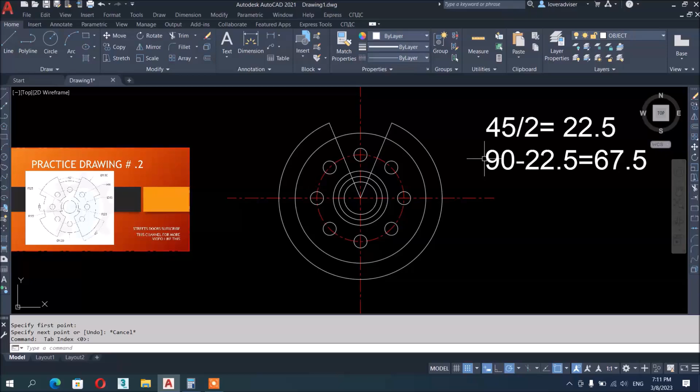Okay, we will start to open a new file. We will remove this grid. Okay, first set the units.

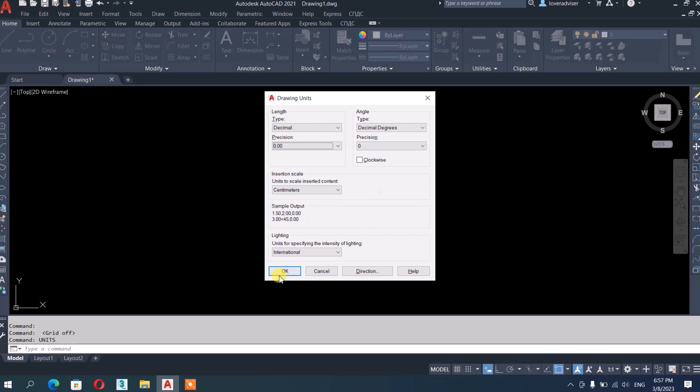Then we will use centimeter, here we use two precisions. We can also use Limits, but before that you have to know what is the size of your drawing.

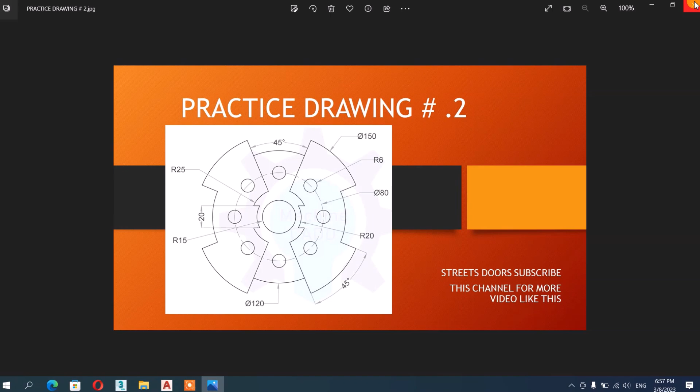See, this is the maximum size, this is 150 diameter, so it means we can keep here 300, a little bigger. So Limits, enter. There is 300, comma 300.

Then we can use, sir, it's all mechanical. First we will do 10 practice drawings of this, then we start the... maybe you forget. No, no, it's okay.

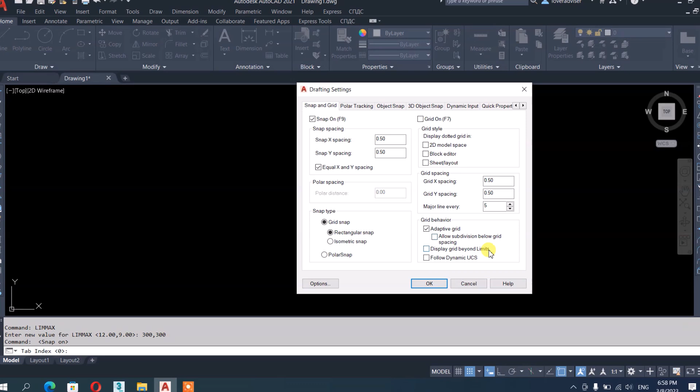It's good, when we are using this one, we are learning too many commands. When I studied more, it was very hard. So after you learn the commands, you can make any type of drawings.

So this is snap, we will use 2D spacing here, and then also snap setting. Okay, this is our drawing sheet. After Limits, we put here 300.

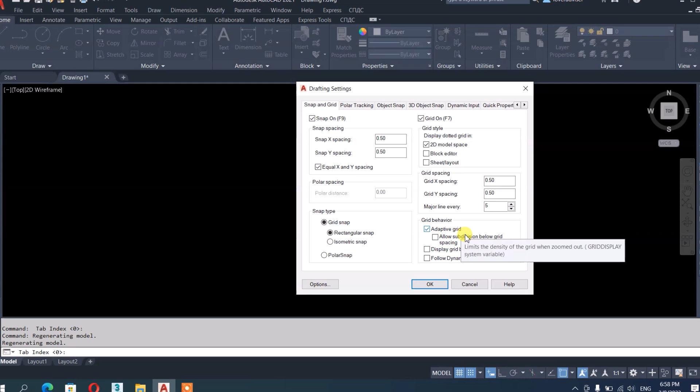Then we make the grid setting. You must know this setting. Must be 2D model space, adaptive grid, and all this unchecked. So the window will be seen in this way.

You can see video in video here. So then we have to set the layers, LA and enter.

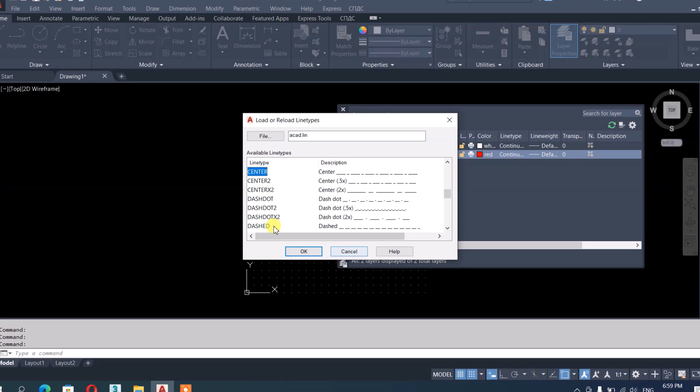Layers, L A enter, and we need here two layers. One is center line, we can choose any color. We're using red color, and then this is the load line type, C for center. Okay, use this center and okay.

Second, I need for object. I am using this same white color, and also I am using this continuous line type. Layers, third, I need dimension.

Dim, and here I can use the green color or magenta color, anyone. Okay, this green color for dimensions.

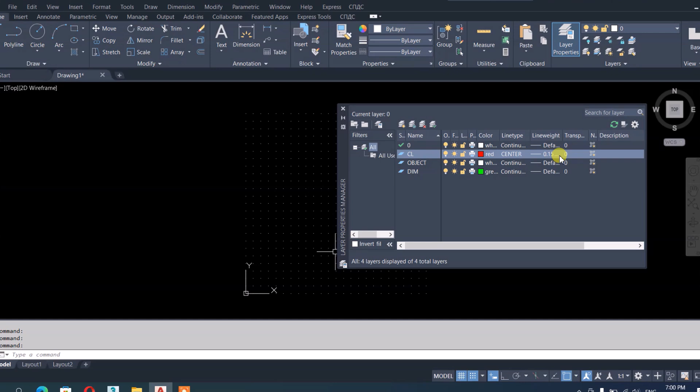Also, we can use this pen assignment, 0.15 mm for the center line. For the object must be heavy thickness, must be 35 or 40, and the dimension also 25 to 20. We give the thickness of the line weight.

So now we will use this center line first for making the center line. See here, line, L enter, then approximately start from the center. So this is almost center of my drawing. So this is ortho on for the straight line, so it goes straight.

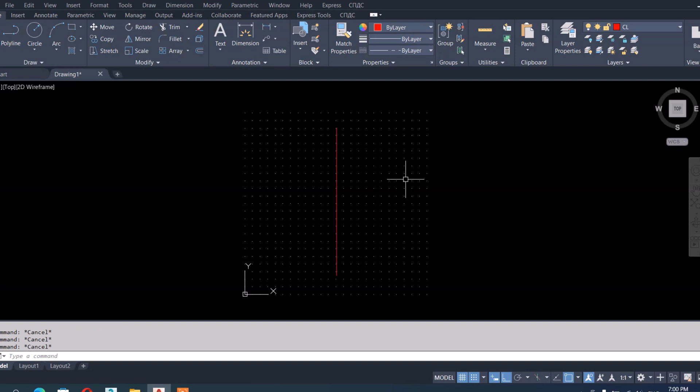And now we will rotate this by rotate command, RO enter, select object, take from the midpoint, and then use C for copy, and then click up. So this is rotate copy. In this way you get the center point of the diagram.

See now my center. If you want to remove this grid, you can remove by clicking here. So now you are getting this clear screen.

Here also, if you want to show the center line clearly, make LTS and give here 10 more spacing. So he shows the tabs bigger than before, LTS means line type scale.

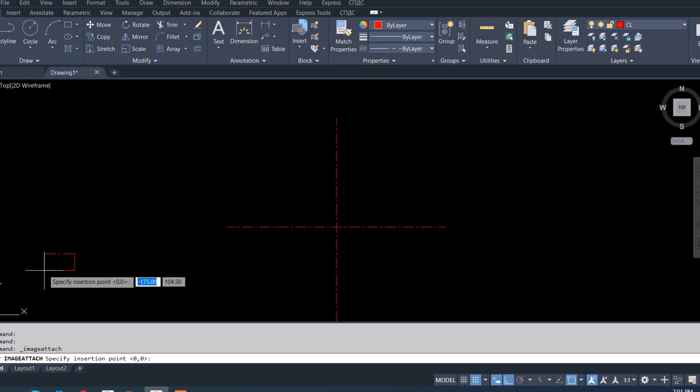See, insert a raster image and go to this practice drawing. Today is about this drawing. So I am inserting here, and then I scale this one around 5. So this is my drawing today.

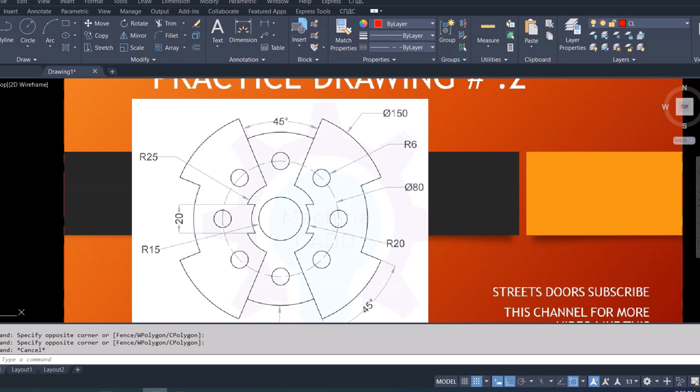Practice drawing number 2, we have to make today this drawing. So here we are finding one small circle, and then other circle is radius 20. Then we have dia 80, dia is 80, this dia 80 means this is the center point of the circles. Then maximum dia we have dia 150. So we will start gradually this.

First I will change the layer and I am using this object layer. Here first I will make the first circle, his radius is 15. So C enter, and go to the center point, and this is 15.

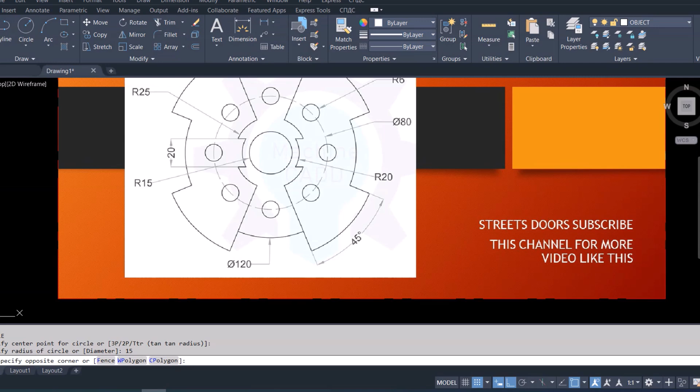Then he is saying the second is here, this is 20. So C enter, center, and then this is 20. Then he is saying we have one other circle, his radius is 25, so we are making this circle 25.

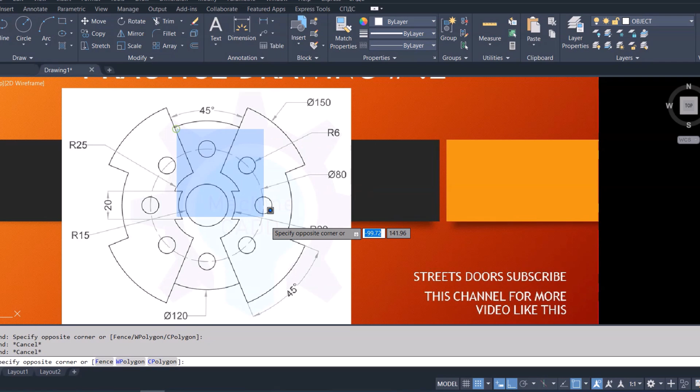Okay, now we completed this one, right? First 3, yeah, first 3 we completed. Now he is saying this small circle, his center dia is 80 regarding to this.

So I am making one circle, center, and his dia D 80. So this is the center dia of this. Using this center line because this is not a circle, this is showing the center line.

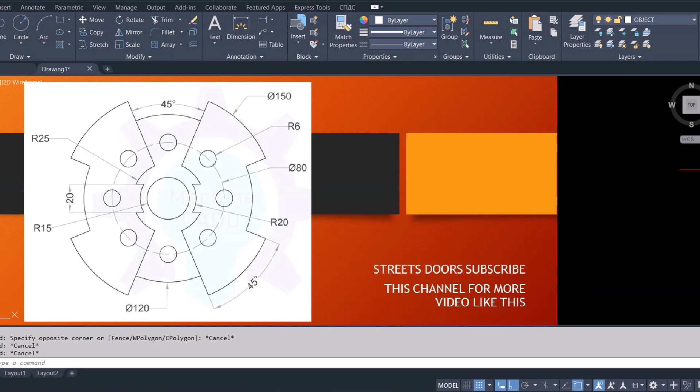See here from this straight 90 degree, he is using this small circle. His radius is 6. So how many this circle? 1, 2, 3, 4, 5, 6, 7, 8. Right? 360 divided by 8.

Today I will give you another command so you can make perfectly this, without calculating any angle. Center and here I am making this, radius is 6, correct? Now I need the 8 circles.

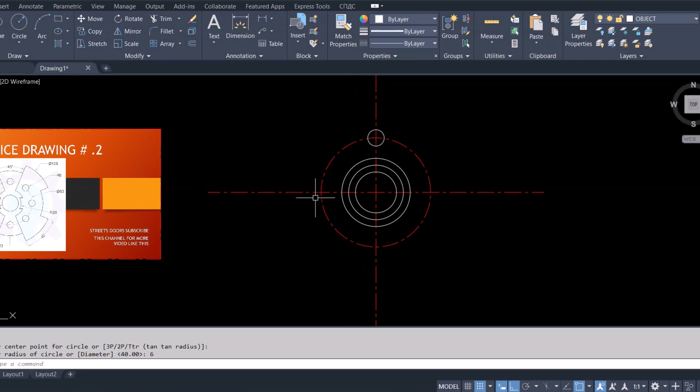See, if you will see any similar object in similar distance or equal distance, we are using array command. What, array command? Array? Yes. See, first AR enter,

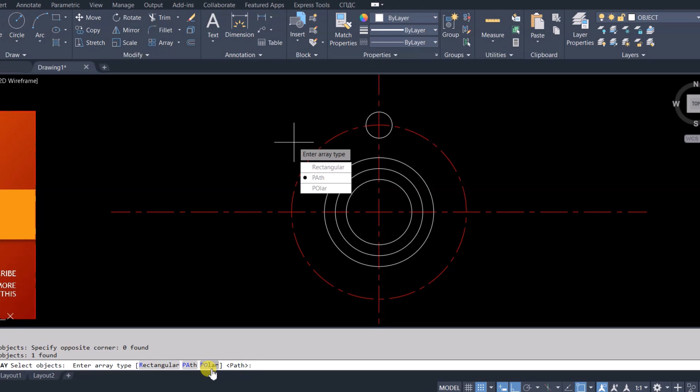select this object, enter. Then he is saying, what do you want? We have 3 options in array command: rectangular, path, polar. For circle, we are using polar option.

So you can click here polar and then go to the center of array. Then it comes directly here. But by default this is 6 items. We need here 8 items, so I am making here 8.

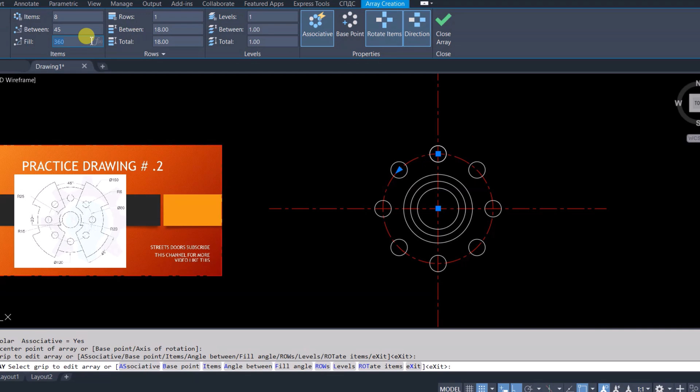See now he makes 8 equally similar objects. Then automatically he calculates the angle between them, and the total is 360, the full angle. So this small object is clear now.

Now he is making this dia 120 and then bigger dia 150. So here I am making circle 1, his dia is 120, and then the last his dia is 150. Now we completed all the circles.

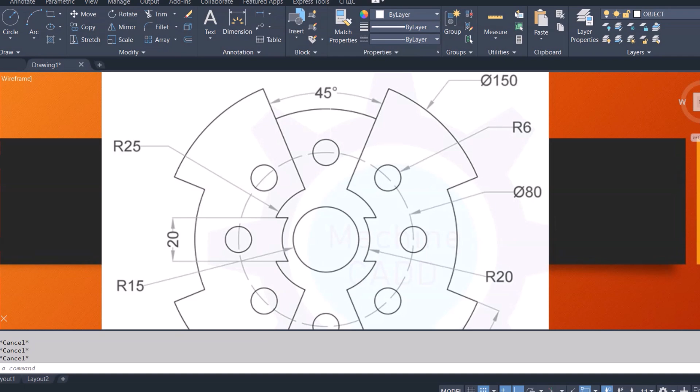Here he is saying between these 2 lines there is a 45 degree angle, right? So I have to make 2 lines, between the lines is 45 degrees. So from here, how many do I minus from 90?

It becomes half of 45. So we can calculate from here, circle. See, 45, 90, my 45 divided by 2. This is my angle, 22.5, right?

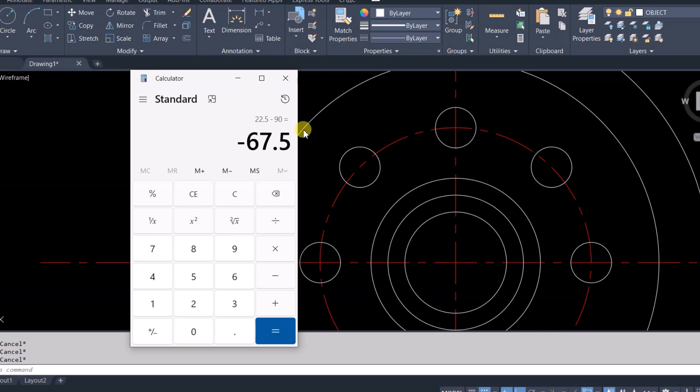So minus 90, this is 67.5. Minus 65, yeah, 67.5, 67.5. This is my angle.

I will make one line, L enter, go to here and say to here 250, and angle is 67.5. What I calculate this, this is my one line from here to here. This line. This line. This line, huh?

This line. Yes, one minute, how did you get it? That one. So the angle they give is 45. Yes, angle is 45. Okay, here I write, angle is 45, divided by 2, it becomes 22.5.

22.5, yeah, okay. Then our bigger angle is 90, right? Minus 22.5, then it's equal to 67.5. This is my exact angle.

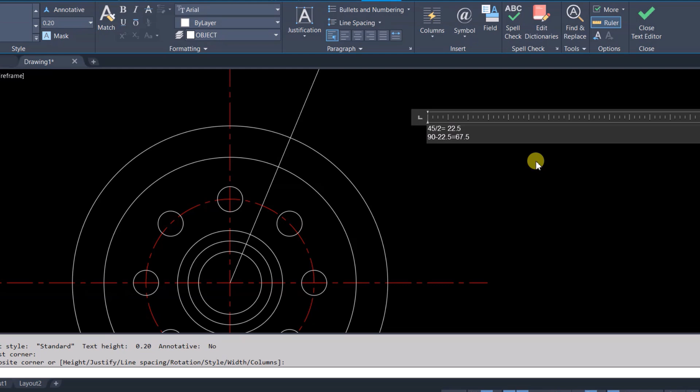I saw 90 angle. What is the 90 angle? What do you mean, the bigger angle? See, this is my 90 degree.

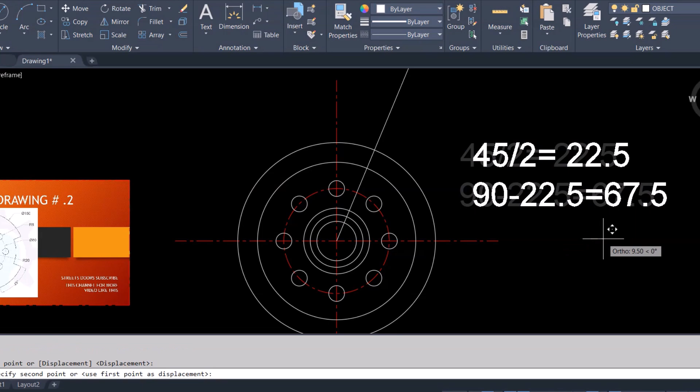See, if I go from here 0 to this is 90 degree. From 90 degree, how many less it becomes, 45 both sides. So this is 22.5. Okay, then this is the angle measurement. 67.5 is my angle.

Then I will make here mirror, MI enter, then this is mirror. I will cut from here this and this, and then this and this. Right?

Just this is making it screen recording. Screen? Screen recording this. Okay.

See here, now he is giving suggestion here, dimension. From this angle to this angle he needs 45 degree. So this is similar here.

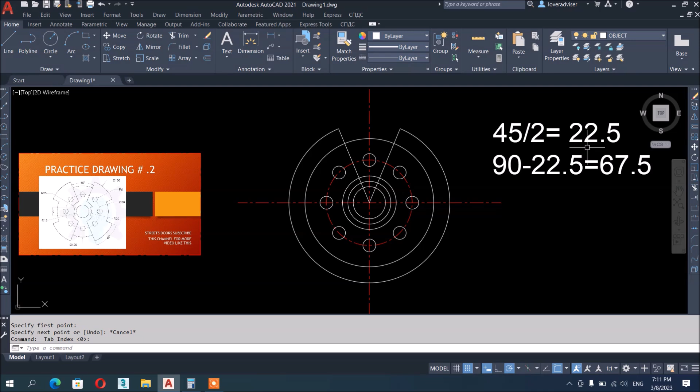This is already 22.5 degree. So we have to add also 22.5 here to become 45 degree. Here is showing 45 degree, right? So in the polar, I can give here

22.5 degree. Polar means it will move the same angle, from here to here. This is 45/2, 22.5 degree. Where does 22.5 come from?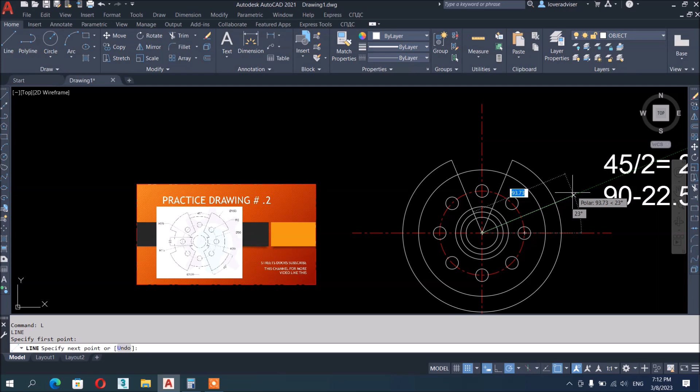He will give you the angle measurement. Okay, this is 22.5, so second is coming. This is 22.5, so I will click here. Then I will make this line from here to here.

So it means it will be moved from here, and then I need to move this one here. Clear? See, remove this line. No need, also no need.

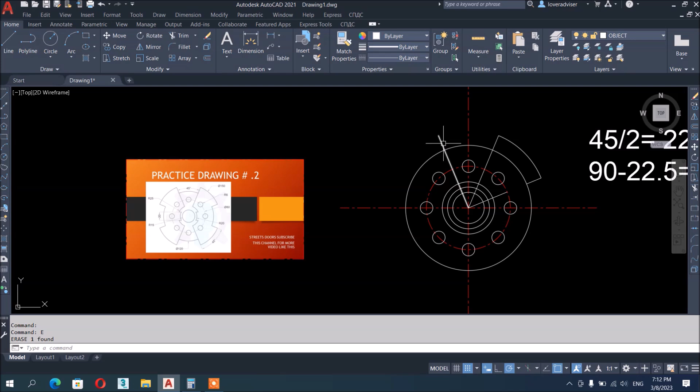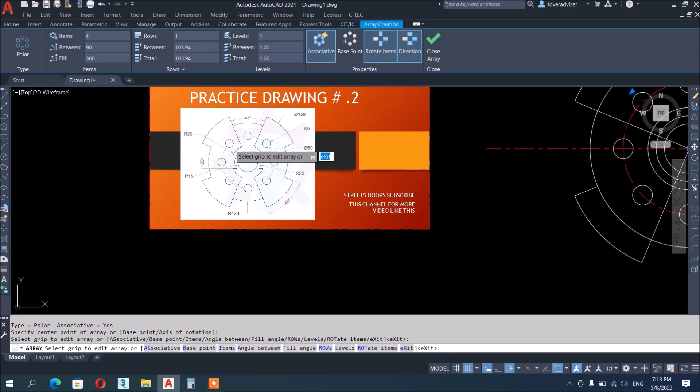This I will make array also, AR enter, click this, and go to polar, go to this center point and use here 4 enter. So this is from here, this is done, huh?